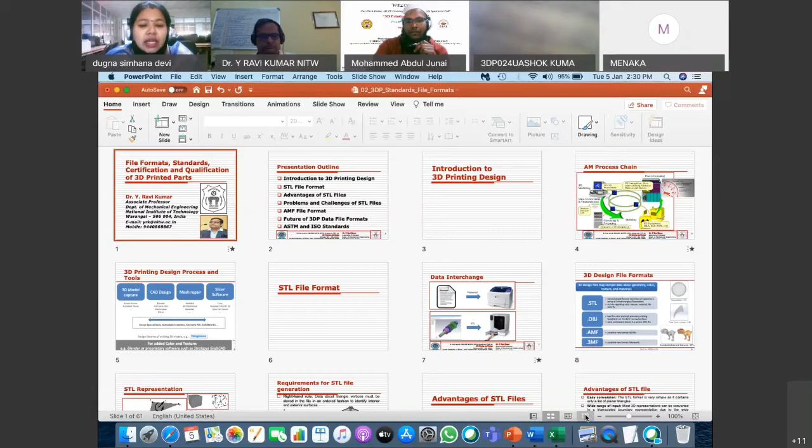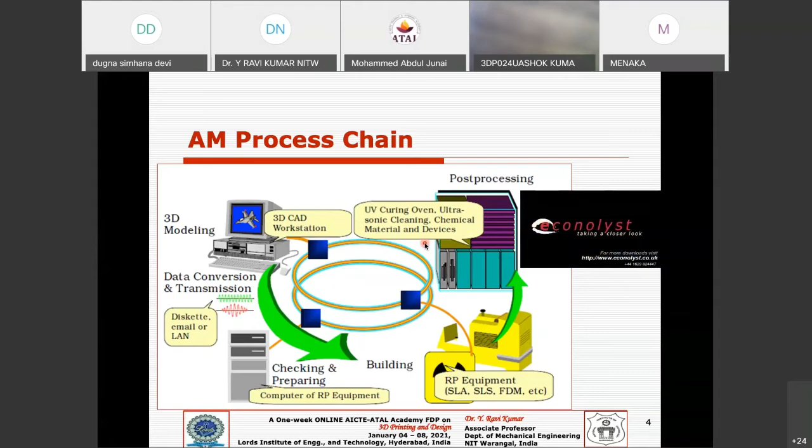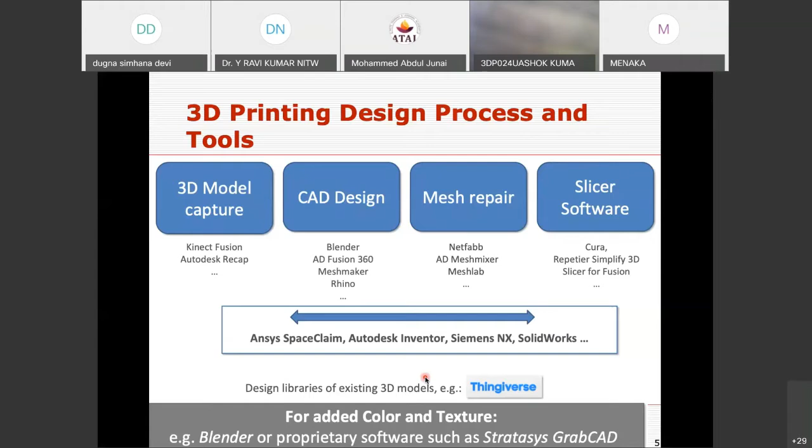So with this, this is a typical design process and the tools available, or the steps involved, while generating your codes in your 3D printing process. So then when we are talking about an STL file, what is an STL file all about?

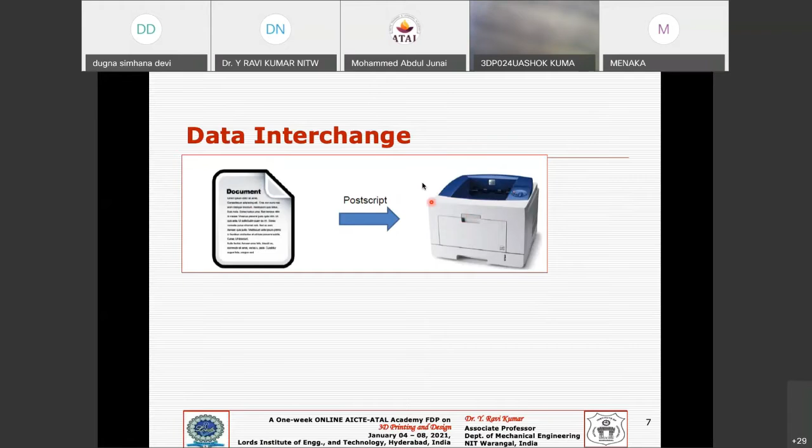So an STL file, basically we need to interchange the data - like your laser printer or inkjet printer, how either a document file, a JPG file, a PDF file, or a PPT gets recognized by your printer and how it gets printed. Your drivers may read this, interpret this into a PostScript form, and that PostScript form will be sent to the printer codes, and it gets printed. So the counterpart of this PostScript, in case of 3D printing, is going to be an STL file.

So you can save your model in this STL file format using any of your CAD modeling software. Once you save this model into an STL file, you can send that STL file to the machine, and based on the code which you have generated, it's getting printed. So basically your STL file is like a PostScript for your office printers or desktop printers. So here is an STL file.

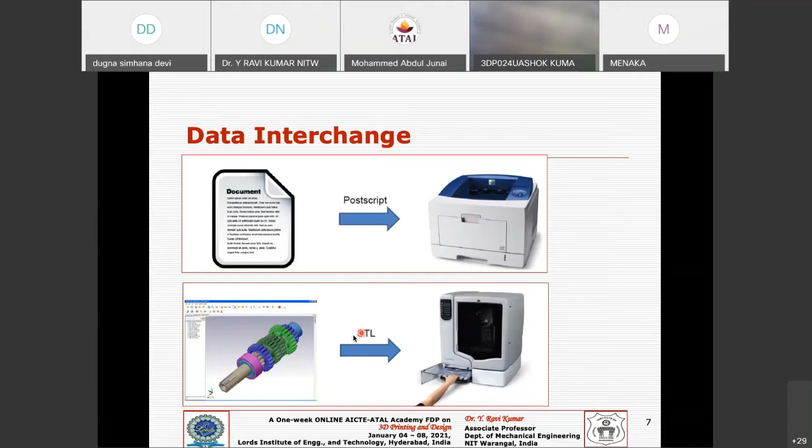So what is an STL file? Any CAD file, or any 3D design file, consists of the geometry - that is the coordinates or dimensions of your model - and the color of the models, the rendered images, colors, and textures. It consists of some textures in that model, and of course it consists of the material information also.

But if you are coming from a CAD domain, you know better - IGS is one form, Initial Graphics Exchange Specifications, called IGS, and STEP is another file format. Similarly, your STL file is the neutral format for 3D printing, unlike IGS and STEP files. Unfortunately, STL supports only geometry, but it doesn't support color, texture, or material. So that is the problem.

And more or less, STL file is a mesh - a triangular mesh. This triangular mesh is basically an approximation of your surface. But you may have other file formats like .obj, the object file. If you talk about object file, you don't need to convert it into triangles, or tessellate them into facets - the free form curve will be represented in case of OBJ.

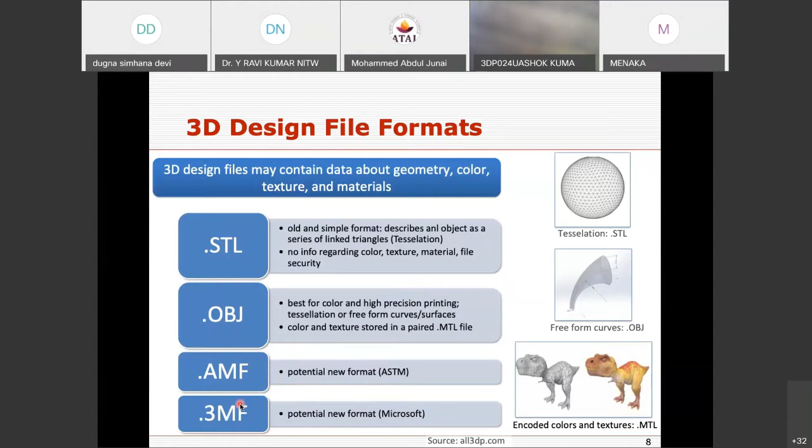An STL file is a triangulated mesh. So if you have a cuboid, at the moment you convert to an STL file, your entire model is represented into a triangle mesh. Typically you have 6 faces in case of a cuboid, and 6 into 2, so on each face you may have 2 triangles, giving you 12 triangles for a typical cuboid. But if you take a sphere, it is more complex.

A sphere is a non-linear or free-form surface, unlike a cuboid which is flat. A sphere is circular and free-form, so you may have more triangles in case of a sphere than a cuboid. If you change to other geometry, you may have a different number of triangles based on that geometry.

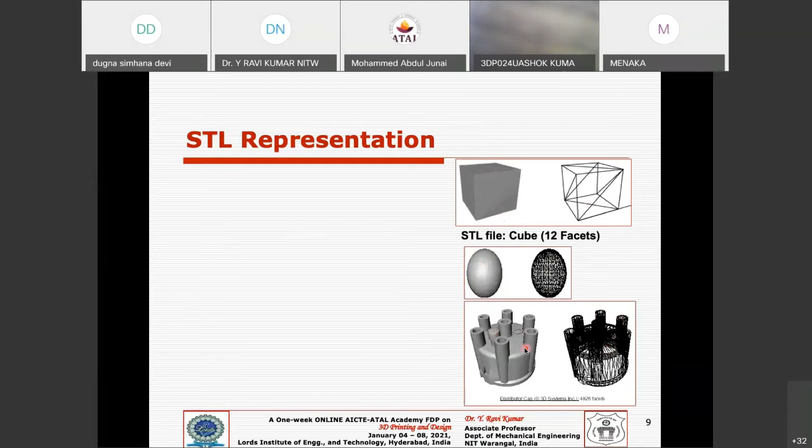But whatever the geometry, your STL file will have a certain number of triangles, and for each and every triangle you have coordinates - x coordinate, y coordinate, z coordinate - because it is 3-dimensional data. I have the vertices v1, v2, v3, and the corresponding x, y, z coordinates will be there in the form of a coordinate.

Apart from the triangle, I have a normal, which is a vector, and those vector coordinates are also there in your STL file. This is a typical ASCII file format. If you go to binary format, as we know binary is machine understandable language. So you either save this STL file as binary or ASCII. If you save in ASCII, you can read out the coordinates of the triangles.

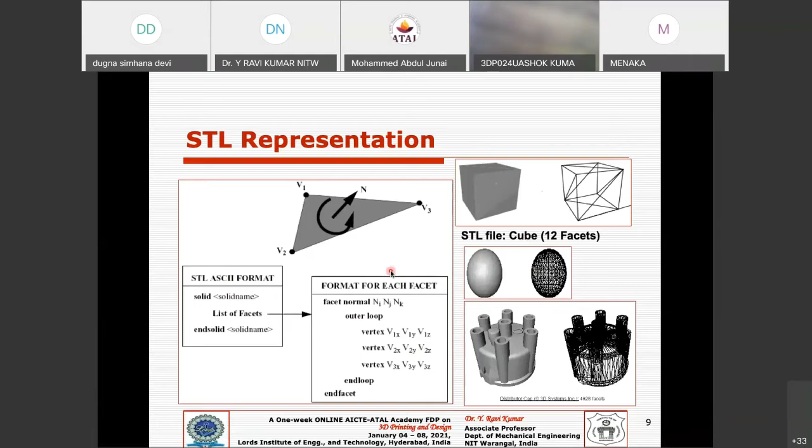It doesn't matter what form you save it in, everything is represented in terms of triangles and their coordinates. And the STL file must satisfy 2 rules. One is the right-hand rule, another is the vertex-to-vertex rule.

What is the right-hand rule? If your triangle belongs to an interior surface, then you have 2 chances - a particular triangle may belong to an interior surface or an exterior surface. If a triangle belongs to an interior surface, the notation will be clockwise - that's the 1, 2, 3 convention in your data structure. If the triangle belongs to an exterior surface, it may be an anti-clockwise notation, so 1, 2, 3 will be saved that way.

So that's the right-hand rule. Then you have the vertex-to-vertex rule, which says that you have 2 adjacent triangles, and these 2 adjacent triangles must have a common side. Then it satisfies the vertex-to-vertex rule. Any typical STL file must satisfy these two rules.

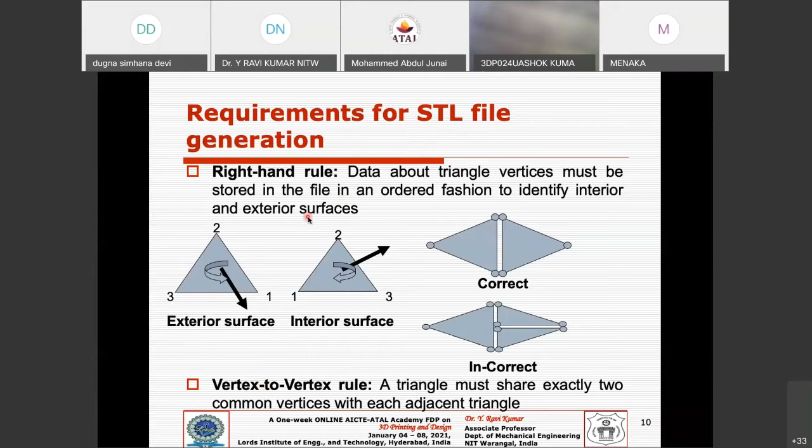What are the advantages of STL files? One advantage is easy conversion - the file consists of planar triangles, and a planar triangle is the simplest of all polyhedra. The polyhedra family starts with the triangle, which is the simplest of all polyhedra.

Why triangle? Why can't it be another form? The reason is it's the simplest of all polyhedra, so it's very simple since it contains only a list of planar triangles. That's one advantage.

It also has a wide range of inputs, meaning all CAD/CAM/CAE packages have this STL file tessellation algorithm built in. These triangulation algorithms are inbuilt and are more popular and widely used in all CAD/CAM/CAE packages.

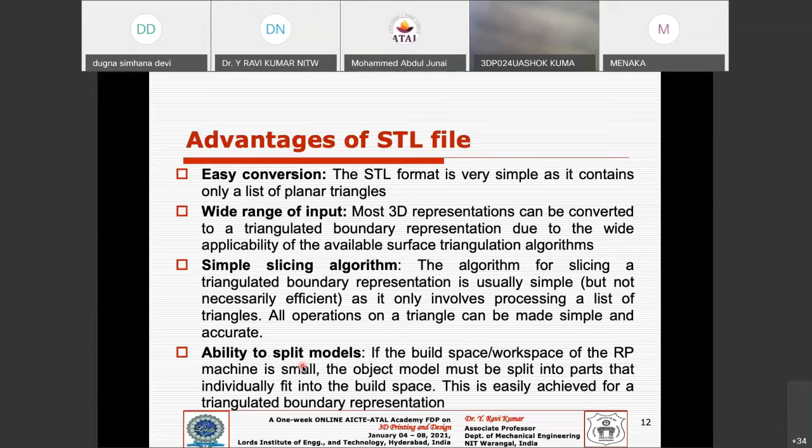Now what about the problems? Once you're talking about the advantages, what could be the problems of this STL file? The problems are in several folds. It will be, say, by the boundary representation, because of the approximation of your curve into a triangular facet or triangular edge. So it is an approximation.

And then you may have some intrinsic problems, like in terms of file size, truncation error, incompleteness, inconsistency, inconsistent normals, or incorrect normals. We'll discuss them one by one.

And you may have issues because of your CAD software, which has an algorithm that converts it into an STL file, transforming it into this tessellated format. That may create some kind of gaps, internal walls, degeneracy, or deviation, either in terms of geometry or topology. Sometimes incorrect intersections will also lead to STL file problems.

We'll discuss these problems one by one.

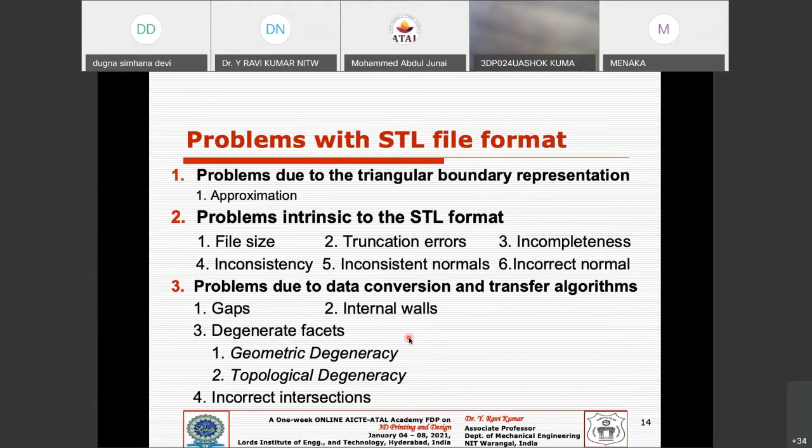And of course, as we already know, if you have some surface generated through a B-spline, a NURBS surface, or a Bezier surface, the moment you save it as an STL file, your surface is now approximated with triangle edges, approximated in terms of triangular edges, triangular facets.

So you are losing data, or you have some error, from the original geometry to the STL file representation, but you can't do anything about it. Why? Because this is approximation by the rule, by the syntax and semantics of this STL format, and you are losing some data. You are not transferring your data fully to the STL file or to your 3D printer from the CAD to the 3D printing format. You are losing some data. Basically you are approximating, you are not taking 100% of the data.

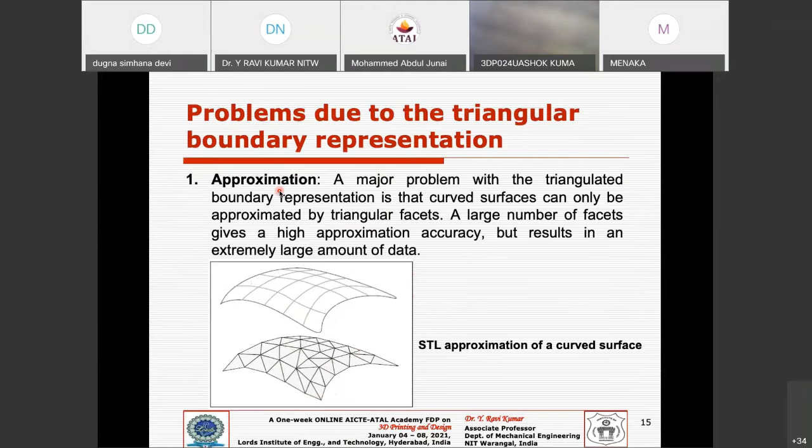And then you may have the intrinsic problem that the file size is too large. Why? Because you have redundancy because of edge duplication, which may unnecessarily lead to a bigger file size.

Your designer might have used dimensions as double precision real numbers, for example. But the moment you save that data into an STL file, your double precision real number gets truncated into a single precision real number, where again you get a truncation error. So from the original designer's geometry or dimensions to the STL dimensions, you're truncating some values, resulting in a truncation error.

And it is an incomplete representation. Why? Because the STL file doesn't support topological information, it consists of only geometrical information - that is, in terms of coordinates. It doesn't support associativity or connectivity, which we normally call topology. Because it doesn't support topology, it is definitely an incomplete representation. It never becomes a complete representation.

And inconsistency may be due to tolerances. Whenever you join two STL files at an appending portion, it may have some inconsistent tolerances that you can come across. This may be another problem intrinsic to your STL file format.

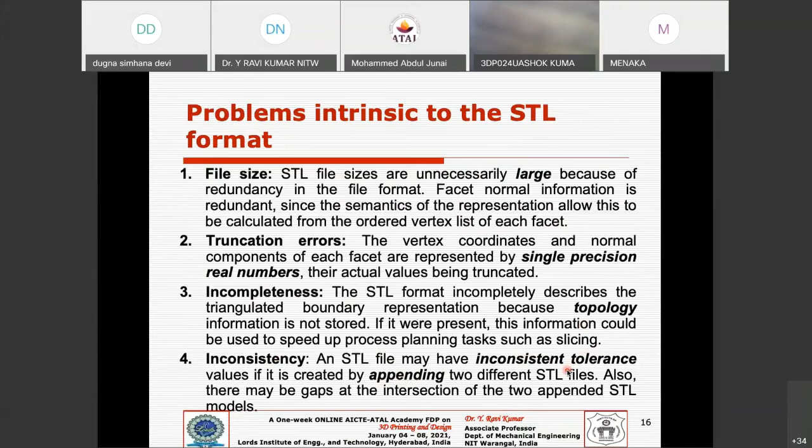And some inconsistent normals - your normal should every time be projecting perpendicular and outward to the outer surface. But sometimes it may be projecting inside, so we need to flip those normals. That may be another problem: inconsistent normals.

Some incorrect normals can also be an issue. Normally you have the triangle facet information or the triangle side coordinates. From the side coordinates, you can even reverse calculate your normals through vector calculus. But it may mismatch the value you calculated with what your tessellation or conversion algorithm has given as the STL output. There is a deviation between the calculated values and your software given values, so there is an incorrect normal issue as well.

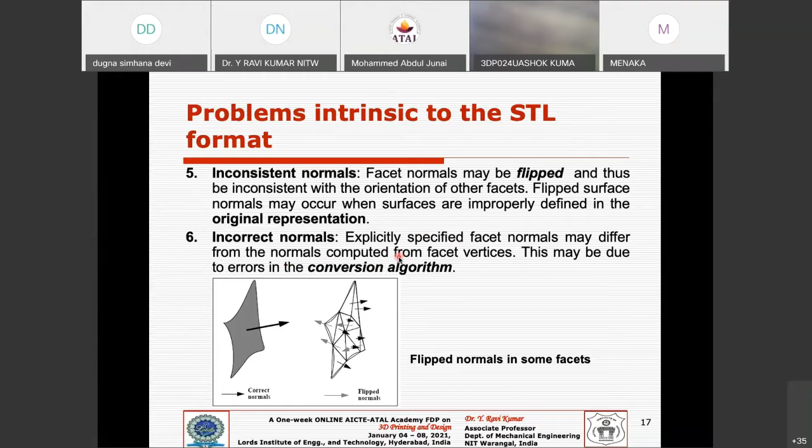Then you may have some data conversion algorithm issue, like a triangle getting missed. So you have one surface, another surface, and at the junction of these two surfaces, if one triangle got missed, the next step will be slicing. Say I have a slicing plane with 0.1 mm, meaning 100 microns, if I try to slice this model, and if a triangle got missed, it may not result in a closed boundary or closed contour. If the triangle had not been missed, you might have gotten the closed contour, but because of that one gap, it never becomes a closed contour.

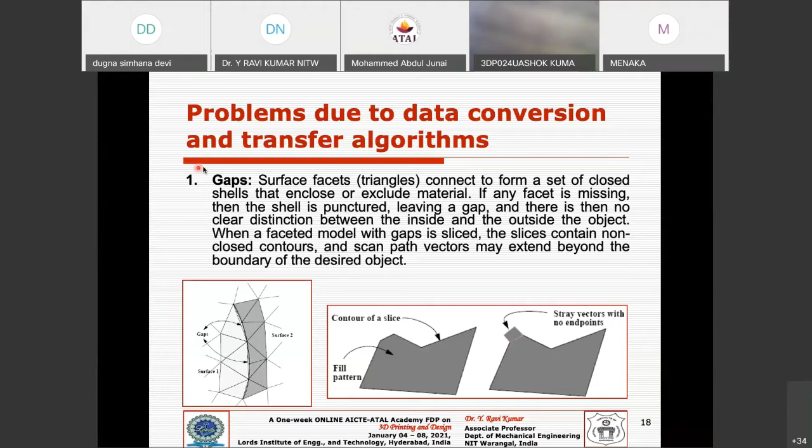If it never becomes a closed contour, your laser or extrusion nozzle cannot have a clear cut path to deposit or scan if it's a laser-driven technology. So you may end up with a kind of stray vector which has no endpoint. That's the basic problem once you have these kinds of gaps or missing triangles.

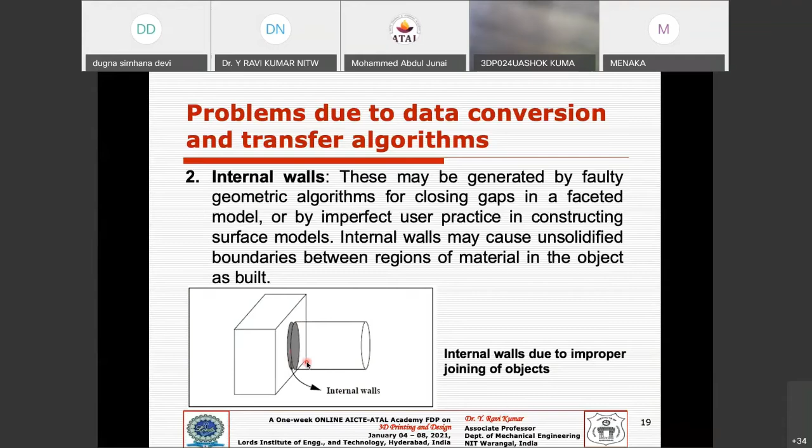You may also have some internal walls while designing. Say you have one surface and another surface, and if the designer misaligned or improperly did this design, then you may end up with internal wall problems.

There's also some kind of deviation or degeneracy. This may be due to even though you have three vertices, all three vertices are at the same location or same coordinates, but that may not produce any surface or area. Once you don't have an area, it becomes a kind of deviation or error in terms of topology degeneracy.

But it may also be the other way around: though you have three vertices, they are not contributing to a triangle or area, because all three are collinear. So it doesn't represent any area of the triangle - this is called geometric degeneracy. So either a topology degeneracy or a geometric degeneracy may occur due to your data conversion, transforming algorithm, or tessellation algorithm while converting your STL file. This is another problem you can normally come across.

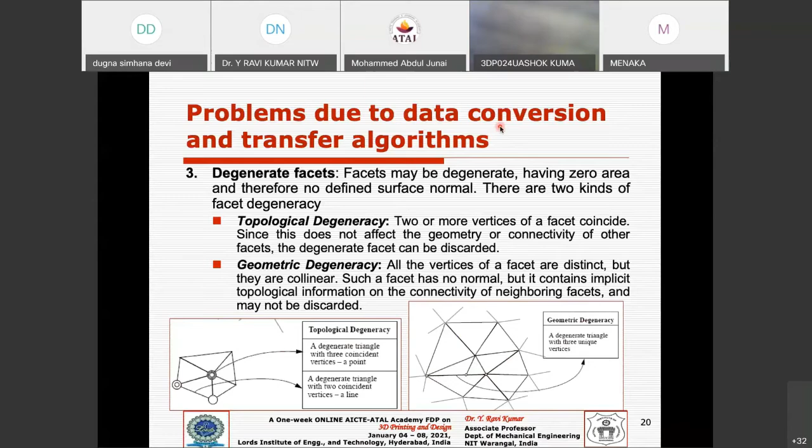The last one is incorrect intersection. None of the two triangles should ever intersect - if it is intersecting, that is treated as an error. We need to place it in the correct position; if it's misplaced, and it's an extra triangle, we need to discard it. So there should be no intersection among the triangles - if there is, it may lead to an error.

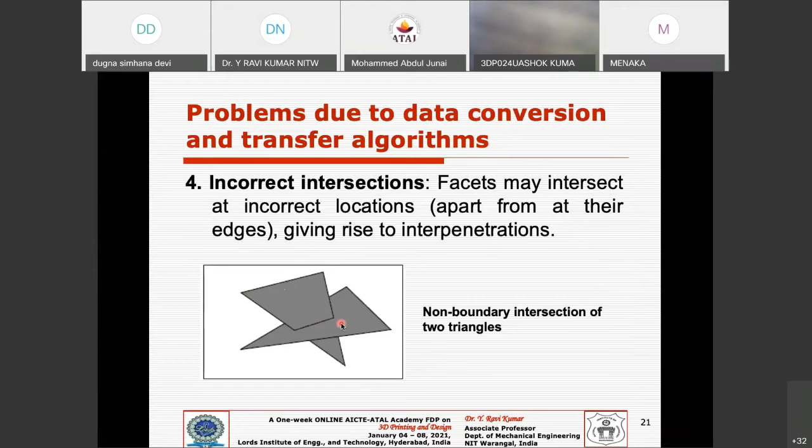If you found errors like this, we need to rectify and correct them. Otherwise, if you are erroneously slicing, the next step will be slicing, and your contours may not get a proper cross section. Altogether you may end up with a build failure or build error that you'd have anticipated at the end of the day. As we know, in computers, if you give garbage in, you get only garbage out. So you have to be careful while handling this data - it should be free from all these errors. Once you are free from all these errors, only then can you say it is a valid model.

So with a valid model, you start with a 3D model, then slice it and generate the two-dimensional slices, and finally you have a 1D slice, the scanning lines. This is the scenario for a valid or watertight model, a model which is free from all the errors.

If at all you have some error in your STL file, in terms of some gap or missing triangle, then while slicing, your slicing algorithm may get confused. It never forms a closed contour or closed boundary. If it is not forming a closed boundary because the triangle got missed, the connectivity got missed, then it never forms.

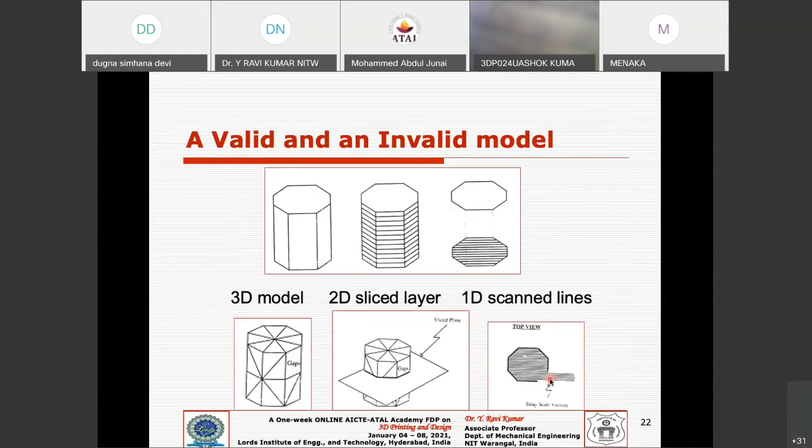Otherwise, if there is a triangle and it would have been a closed boundary, the needle or laser would have been deposited or filled in a more meaningful way. Because you have this error, being an invalid model, your deposition may be abrupt, or it may have an infinite loop or a trace. It may create some stray vector, and then finally may lead to a build failure or bad part production. So we need to be careful while operating with this kind of issue.

What are the challenges with your STL file? The STL file challenges are duplicate information, leaks, inconsistency, and it does not scale well when you have high resolution data and lattice structures. It does not support color, does not support material, and doesn't support orientation. So then how do you address these challenges?

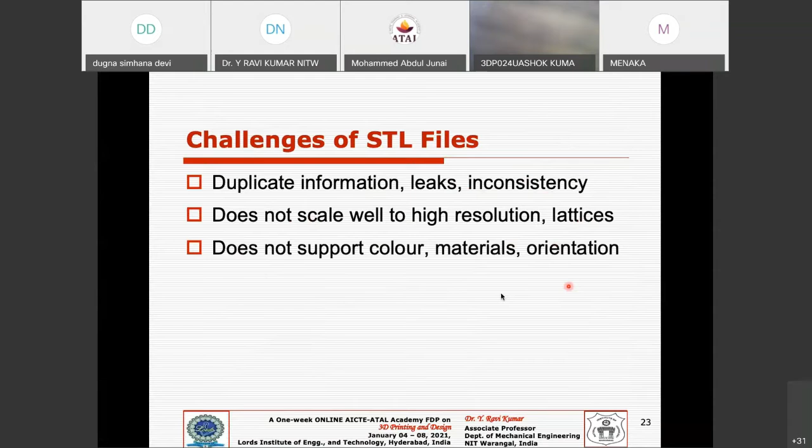That's what the ASTM is proposing: an AMF file format, which will address all these problems and errors that we are talking about. So then how do you get it addressed by this AMF file format?

Basically, AMF file format, that is Additive Manufacturing File Format, is an XML script, and it is going to be the meta format, or format of formats. It's a text-based script, an XML script. It is easy to read, easy to write, easy to parse, easy to edit, and easy to extend, and it can be highly compressed. The data will be highly compressed.

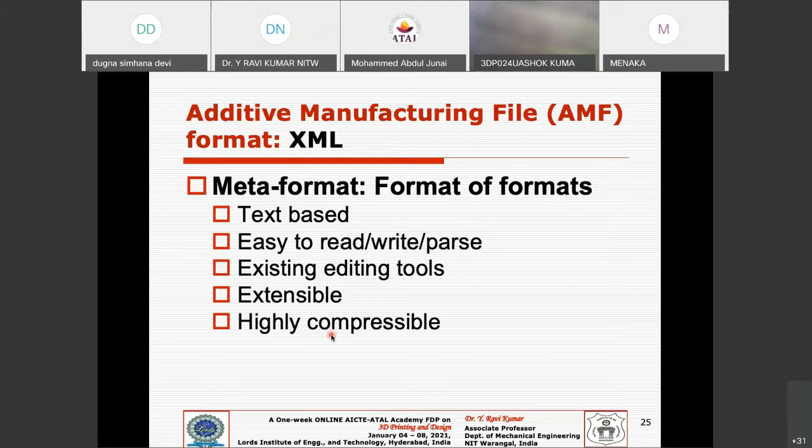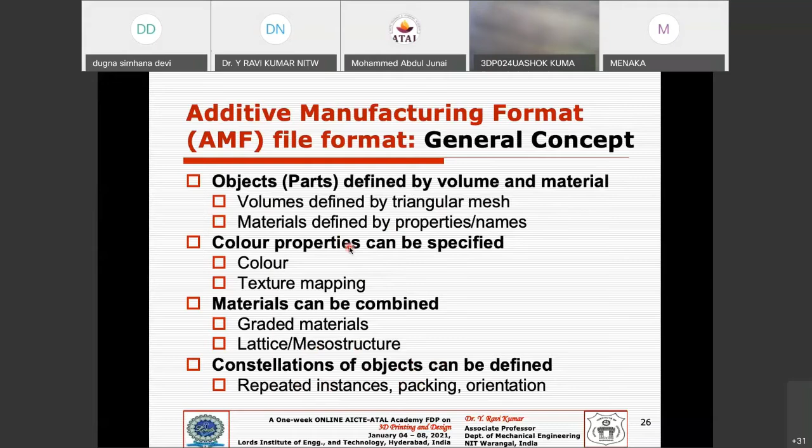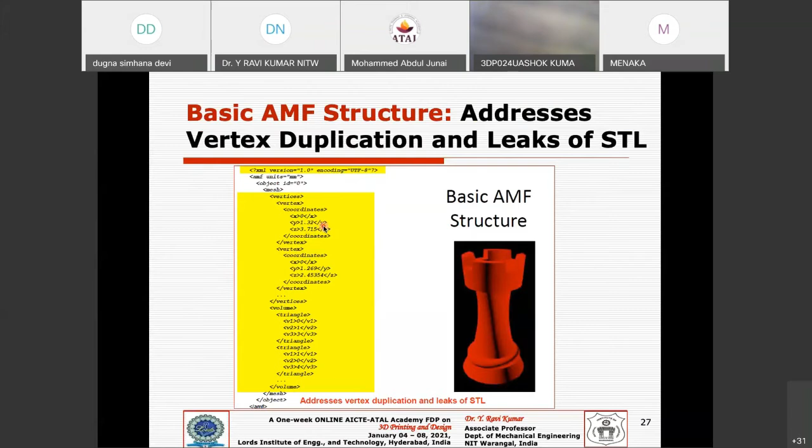Then how do you address the duplication of the vertex and the leakages of the triangles? AMF will address such kind of duplication and leakages because of its XML script nature, and it can be easily compressible.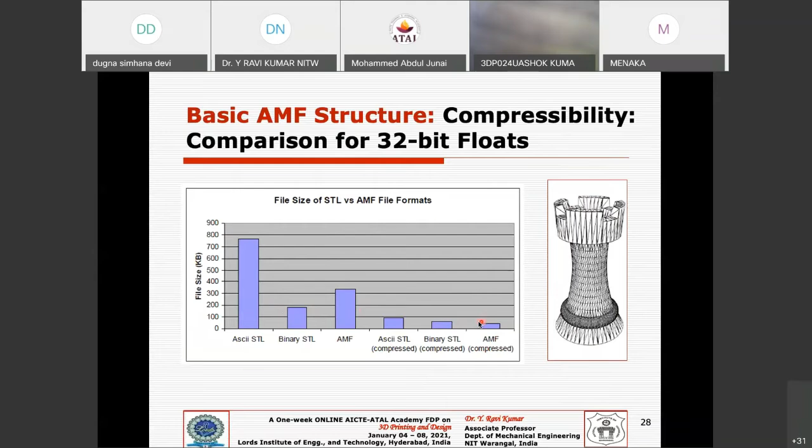But once you compress this data, once you have zipped these files, surprisingly AMF should be in between binary and ASCII. But surprisingly it is even less than the size of compressed binary. So that's the advantage - AMF is more compressible in nature than the STL file. That's another advantage of how it is addressed by the AMF file format.

Geometric inaccuracy may not be there in AMF file format versus STL file format. Why? Because STL, as we understood, uses planar triangular patches, but the planar patches are replaced with curved triangles. So whenever you have curvature, previously STL file curvature is represented with a triangular edge, but here the same curvature will be retained because you are approximating with a curved triangle rather than a planar or flat triangle.

So in that way you can address your geometric error through these curved triangles. Even if you have curved edges, there is an edge tangent also introduced here whenever you have curved edges, and whenever you have curved surfaces, your AMF file will automatically assign curved triangles.

And if you have a flat surface, your AMF file will assign planar triangles. So it is adaptively going to assign different kinds of triangles and tangents whenever necessary. In that way, AMF is going to address the geometric inaccuracy that you come across in STL files, but it is not there here.

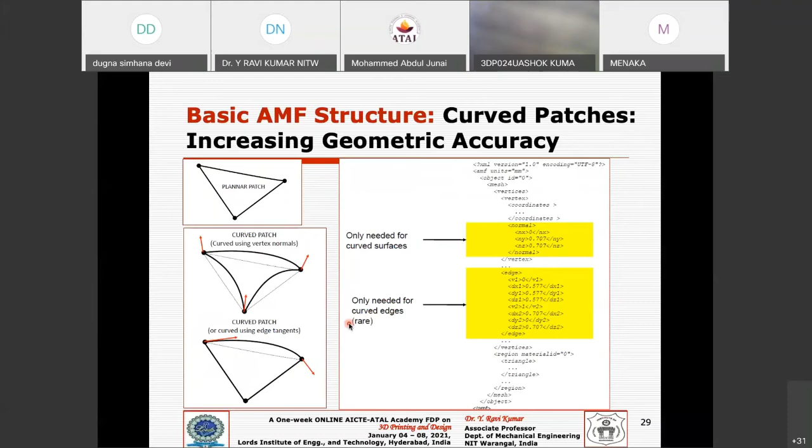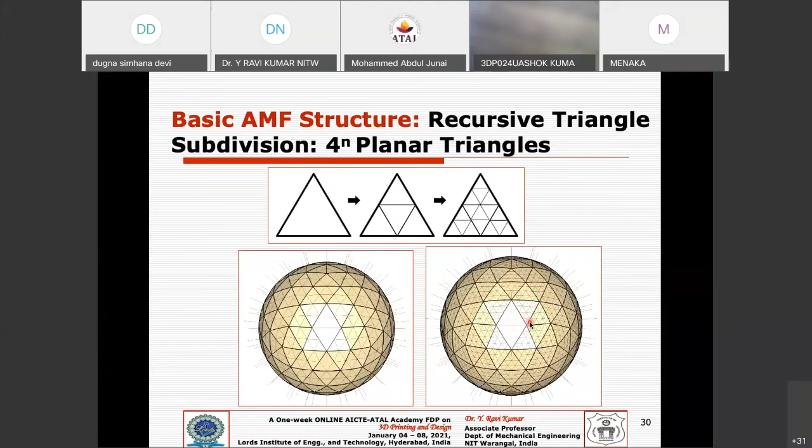And it can even be recursively subdivided, like you can have one triangle, and further it can be 4 power 1, or 4 power 2, and with 4 power n, we can recursively subdivide in order to improve the resolution of your file. You can even do this.

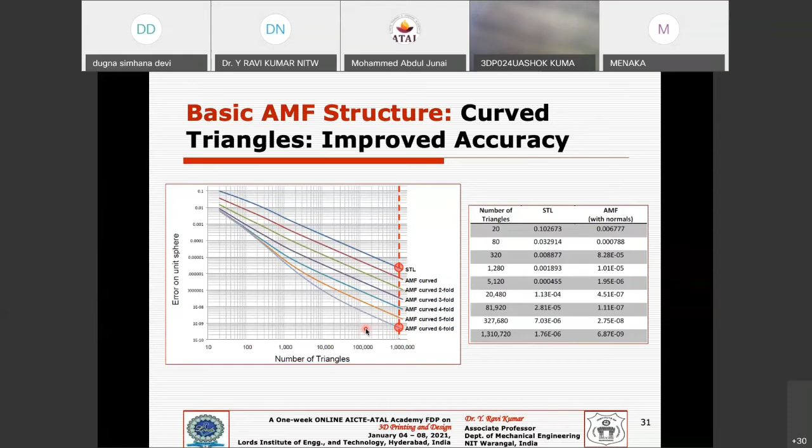And if you see the accuracy improvement or the error, a typical STL file with the same number of triangles, if you compare, say an STL file with the AMF with single fold, that is 4 power 1, and 4 power 6. If you come to the 4 power 6 level where the error is almost negligible, then you can conclude that it's going to be more error free, or the accuracy is high in case of AMF file format.

And even your materials can be assigned differently at different regions. Why? Because your 3D printers can print in multiple materials. So why not your AMF file represent one region with one material and another region with another material? That will be addressed by this AMF file format, through the multiple material representation.

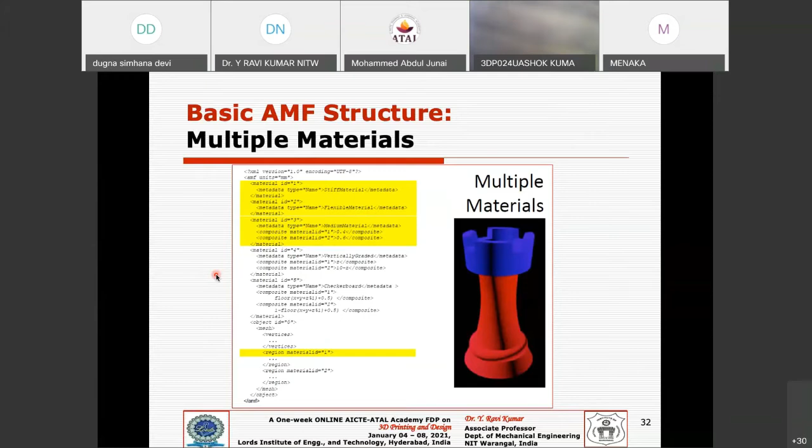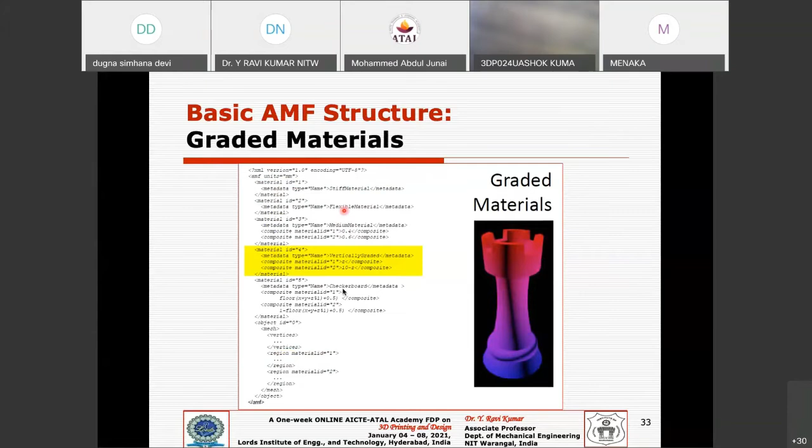And not only multiple materials, you have functionally graded materials, or grading of the material across the length, so you have different compositions. You can specify that grading of the material in your AMF file format. And it will also support microstructural aspects.

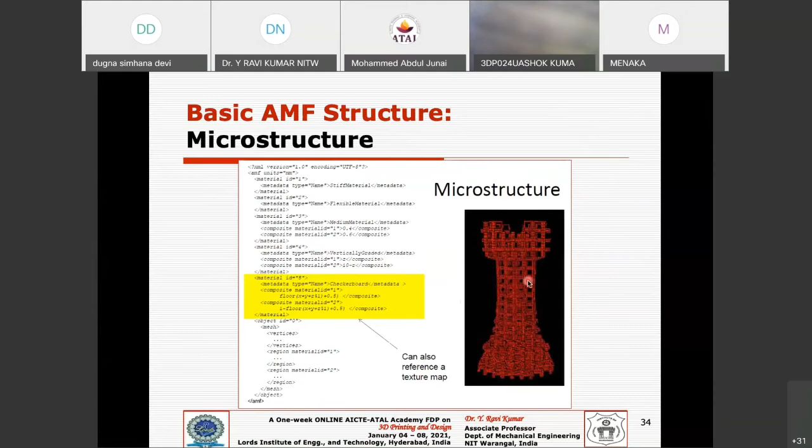So then what is the current status of this AMF file format? The ASTM F2915 is the standard for AMF, and the first revision, 1.1, came out in 2012. This is under adoption, but the adoption is not yet great by all these software vendors. Still, they may be going to a different version, the current version they are developing. We'll discuss more elaborately in the upcoming slides about these standards.

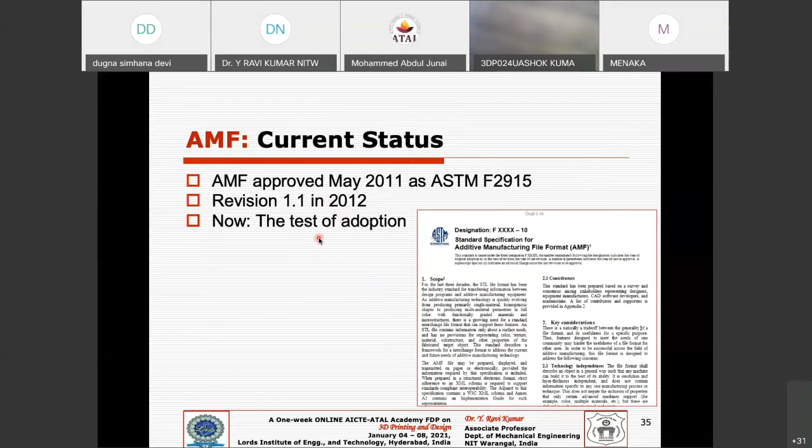So they may have future plans for AMF, getting incorporated while developing the next version of this AMF file format. They have plans to incorporate tolerance information, like you have in STEP files versus IGES. The STEP file consists of tolerance information, whereas your IGES file doesn't support that. But your AMF file, they are planning to include manufacturing tolerances also in the AMF file format.

And they are planning to have surface or depth kind of textures incorporated, and data encryption, copyrights, external references, subassemblies, and process control is also another aspect which can be included in your AMF file format. And non-volumetric support structures are also going to be supported. And it can even be non-mesh geometry, like voxel or feature-based representation. They are trying to incorporate these features in the new upcoming version of the AMF file format.

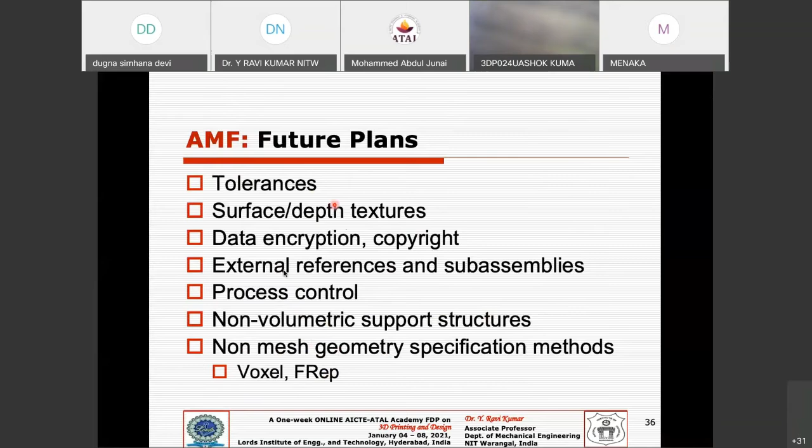So with these future plans, we have thoroughly discussed the STL file format and AMF file format, the various problems, limitations, and challenges of STL file format, and how these are getting addressed in AMF. That we have covered.

And then what about the code, the contour data, or something like G-code, M-code in case of a CNC system? Whereas here you don't have a common file format, different vendors may be using their own proprietary formats for this contour data, or cross-sectional data, or layered data. Like you have SLC, SLI, CLI, RPI, LEAF, and so on. But unfortunately, there won't be any common format for this kind of contour data.

In contrast with additive manufacturing, in conventional CAD systems, as I already said, you may have IGS, STEP, and in the medical domain, you have CT, and in printing you have HPGL. So these are the file translators you typically come across, other than AM. In CAD or the medical field, you normally come across these.

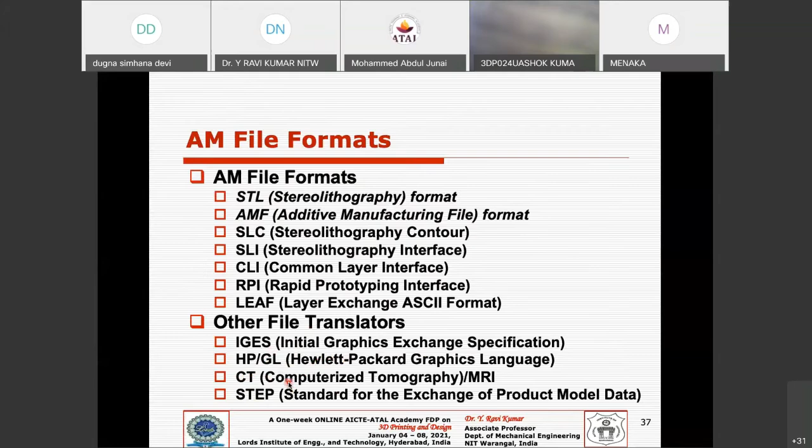So with this, I have completed my first part of my presentation, and let us talk about the next part, that is standards, ASTM or ISO standards.

So first of all, what is a standard all about? The standard is something to be measured, or to have some norm or model for comparison in your evaluation - meaning you have produced some part. So in the last session, participants were asking questions like, how do you get the repeatability? How do you ensure whether you have made a good part or a bad part? Until you have a standard, until you have a benchmark, or until you have some reference, it's not a scientific way of taking a decision on whether it is as per the standard or the norm.

So that is exactly what a standard is. If you see the ASME definition of standard, it can be defined as a set of technical definitions and guidelines - kind of instructions for the designers, manufacturers, and even the users. You can buy a product, then how can you ensure that it is as per the standard, as per your expectation, and that expectation is as per the standard available? Especially if you are exporting your products to some other country, it should be - then only people will buy and trust you, right? Otherwise, until you say some ISO standards or ISO certified companies, then only people have some confidence in you, so then people will buy your product. So that's about the ASME definition.

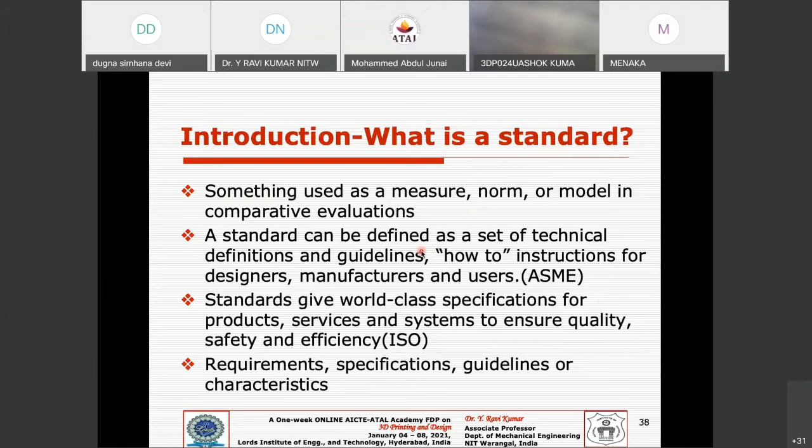So the standards are very much needed for 3D printing. Why? Because it's a relatively new technology. Until you have a standard, you cannot justify whether you made a correct part or a bad part, or how do you ensure that it's getting correct or not, right? Until you have a standard - so then why do we need a standard?

The standards give business and consumers confidence that the goods or services they are developing or using are safe or reliable, and will do the job they are intended for. So basically it will give you confidence, or a kind of business opportunity if you're a manufacturer. So then how will the customer trust you? Once you have these kinds of standards and certification saying it's ISO certified, then people will have confidence that they can buy this ISO certified product or ISO certified brand.

And the standards help make laws and regulations consistent - you can go to court, you can file a case legally, you can proceed saying this is not as per the standard. Until you have a standard, you cannot claim legally. So then it will help you go within a legal aspect.

Also, the standards help ensure the products comply as per the standards, which gives some kind of competitive edge for your products, especially if you are in an international market. Why? Because people will look for what kind of certification he or she is having, who got qualified, or who has given the certification for your products. If you are an international player, this is very much needed.

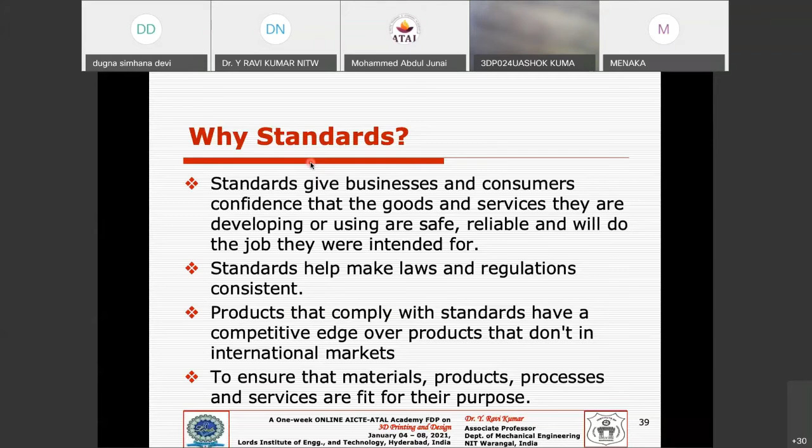And to ensure that either the materials, the products, the processes, or even the services are fit for their purpose - that's what we need standards for. So that is very much needed, nevertheless, for the 3D printing or additive manufacturing industry.

So whenever you want to industrialize - if you are using it for domestic purposes, then it doesn't require standards or certification, that is purely for internal consumption or domestic use. But once you are elevating this technology to industrialization, so AM or 3D printing is getting further industrialized or further matured. So definitely, your AM industrialization may happen only then.

So the standards are very much needed, or the key for AM industrialization. The standards will ensure your process control, and it will ensure product quality assurance, and it will define the levels of criticality, right? And it will reduce the risks of failure. Someone was asking, I am not getting my SLM parts to be more reliable, or I am not getting consistent builds.

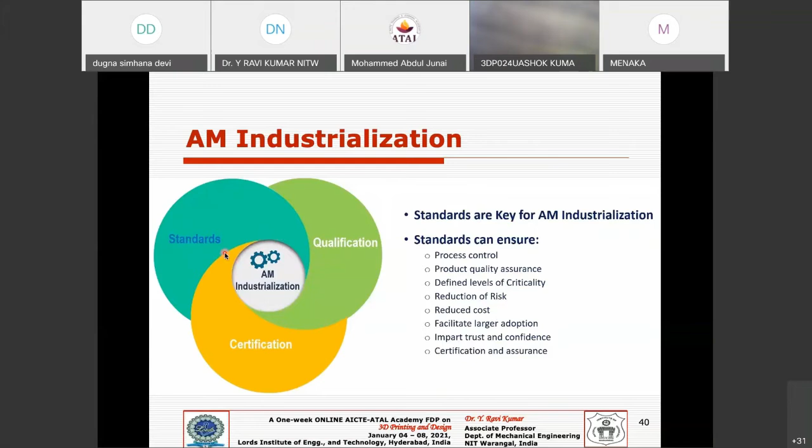I'm going to give you very short time on this. I'm going to give you the statistics of it.

STL files have a lot of errors. So your data formats and retentions, and your raw material should be consistent as per your standards - the powder particle size, or the flowability, or the viscosity, or things like that, right? It can be as per the raw material.

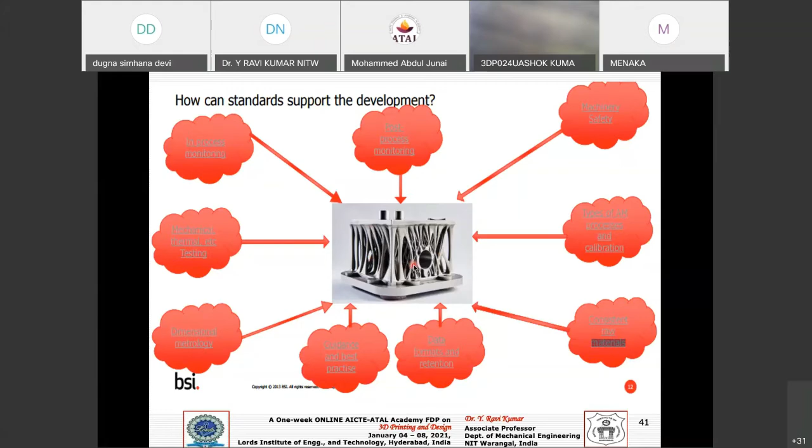Or your feedstocks, and as per the types of AM process, calibrations should be done, and machinery safety. Once you have the standards, post-processing monitoring and in-process monitoring can all be achieved - the best quality of your additively manufactured parts once you have these kinds of standards.

So coming to AM and ASTM - as we know, ASTM stands for American Society for Testing and Materials. ASTM has several series starting from the A series, for steel, concrete, and the like. But coming to additive manufacturing, you have F42 allocated for additive manufacturing standards. So ASTM F42 stands for additive manufacturing standards.

And as I have been talking about, they have classified AM systems into 7 categories, as per the agreement of ISO and ASTM. These are actually two independent bodies - ASTM is an American society, while ISO is an international standard. But ASTM was formed well before ISO was formed.

So ASTM has a long history - it has been around for a long time. And whenever there's an agreement between the international standard and American standards, you get ISO/ASTM - a combined standard developed from both international and American standards. That is, say, 52900, where 15 stands for 2015. It got approved, or published, in 2015.

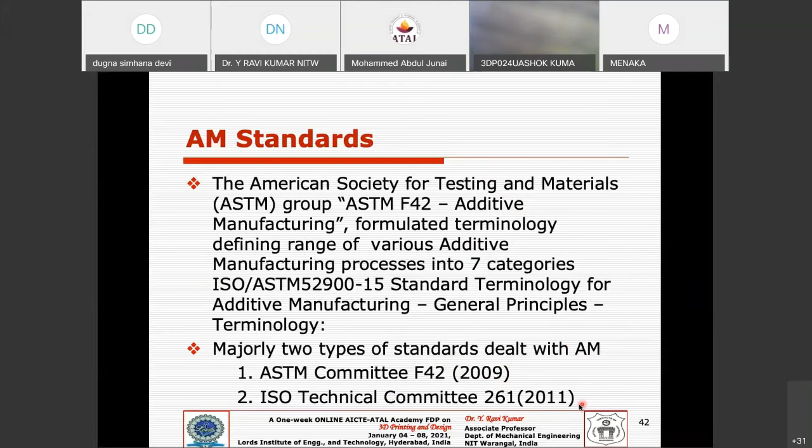You may have general top-level AM standards, category-wise AM standards, and specialized AM standards - meaning application specific, process specific, or material specific. So you can categorize into 3 subgroups.

In general AM standards, you can even start with the terminology. Just now we are talking about - they have given some standards for terminology, that is ASTM F2792, 12A, and from ISO standards, that is ISO 17296-1, and the combined ISO and ASTM, you have 52921-13. That is the general terminology aspects.

Whereas process specific and material specific, you have ISO standard 17296-2, and qualification and certification methods. Somebody was asking in the previous session how do you ensure that qualification and certification could be done - so you have separate things for qualification and certification methods, and requirements for the purchase of AM parts.

If you want to get some service from a service bureau, and you have some standards, then you can issue some legal notice to the service bureau saying that it is not as per the standards, right? So you may have some requirements for the purchase of AM parts - that is also there.

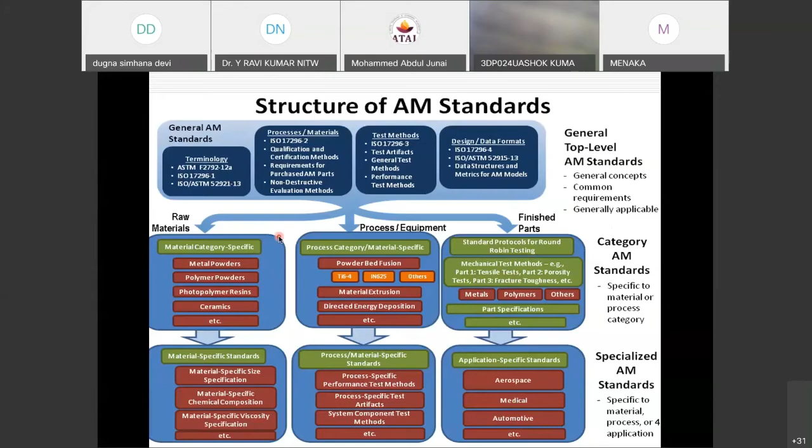This is the typical structure of AM standards - these are the typical categories. As on date, ASTM F42 has several subcommittees. For test methods, you have 3 published ASTM standards, and 4 under development.

For design, you have 2 existing and 5 under development. For materials and processes, 9 existing and 20 under development. For environmental health and safety, none of the standards are available, but they have reserved this category - maybe in future it can be developed. For executive, none available. For strategic planning, nil. For terminology, 1 existing. And tagged to ISO, nil.

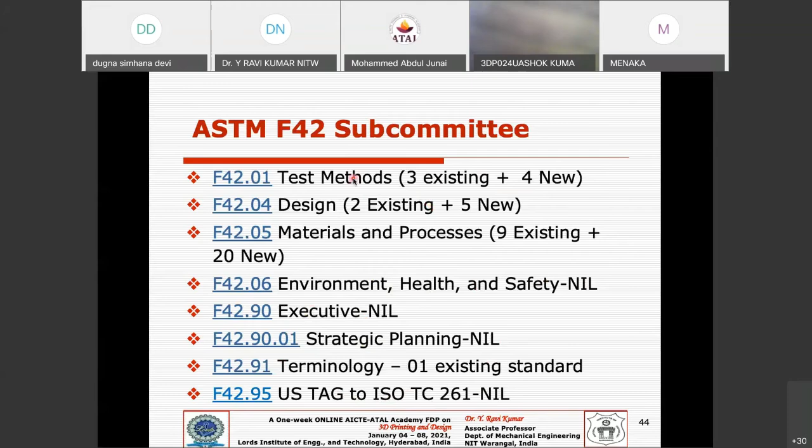So typically you may have very few ASTM standards, maybe if you subdivide into test methods and the other categories. So then coming to the test methods - these are the test methods.

The standard F2971-13 is for reporting data for test specimens prepared by additive manufacturing - exclusively for testing and preparing test samples or specimens. For this we need to refer to it. And for mechanical properties of metal materials evaluation, you may refer to F3122-14 ASTM standard.

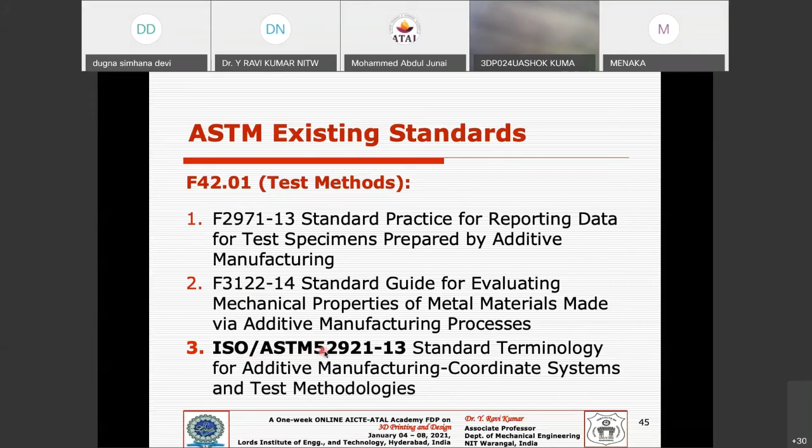Then coming to the ISO and ASTM combined effort, that is 52921-13 - standard terminology for additive manufacturing, coordinate system, and testing methods. This is a combined ISO and ASTM standard, wherever there is understanding between international and ASTM, they have published it jointly.

And for design, the AMF file format we just discussed comes under ISO ASTM 52915-16 - that is the AMF file format, the 1.2 version we just discussed.

Then you have design for additive manufacturing, DFAM. For DFAM standard guidelines, you can refer to ISO ASTM 52910-17. And for terminology, we need to refer to F42.91, and the corresponding ISO ASTM number.

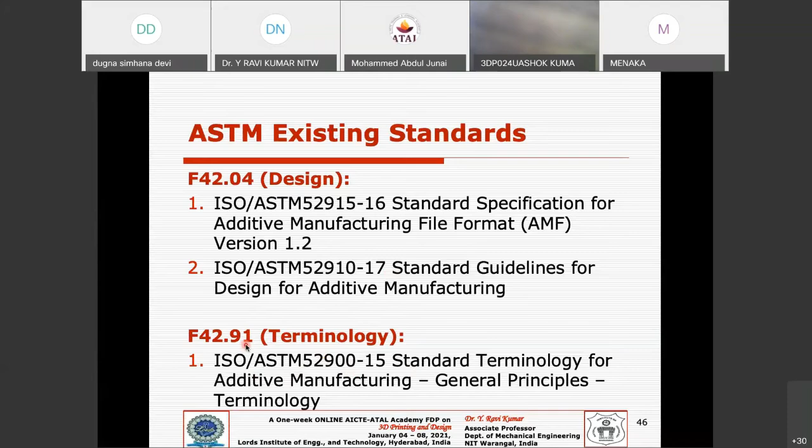Similarly for materials and processes, especially for powder bed systems processing titanium 6-4 aluminum vanadium, this standard should be referred to.

And if you have ELI composition - that is extra low interstitial - for powder bed, same titanium 6-4 ELI grade, this standard should be followed. And for characterization of metal powders for additive manufacturing, you should refer to F3049-14.

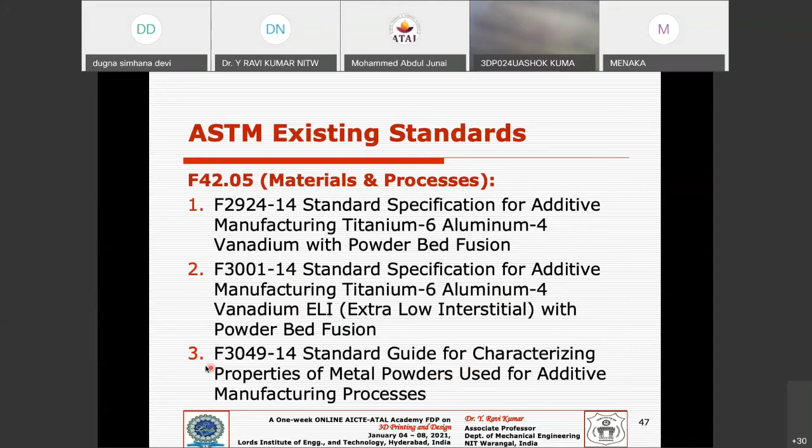For materials and processes, the standard specification for AM nickel-based alloy, Inconel 718, we need to refer this - that's for powder bed systems. The DED system requires different standards.

For powder bed systems looking for Inconel 718, we refer to F3055-14A. And for a slightly different nickel grade, Inconel 625, you refer to these standards - this covers the nickel-based alloys.

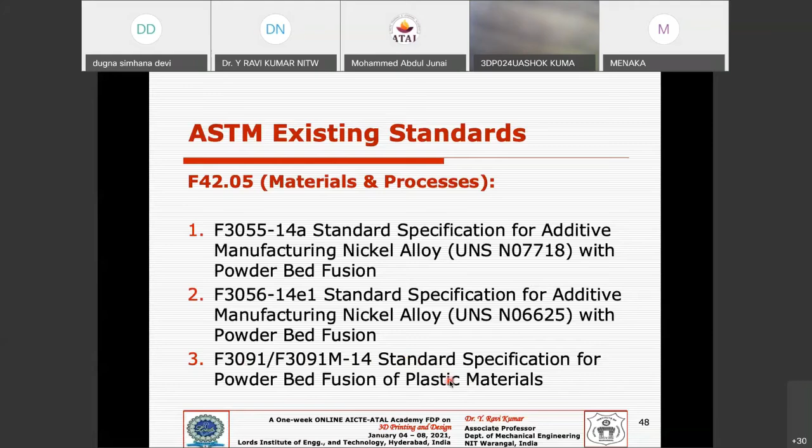If you're looking for polymer material for powder bed systems, we need to refer to either F3091 or F3091M-14 - that's for plastic powder bed systems. And even for stainless steel with powder bed, we need to refer F3184-16.

For the DED system, directed energy deposition of metals, we need to refer F3187-16. And ISO ASTM 52901-16 is the standard guide for additive manufacturing general principles and purchase of AM parts. This is quite important if you are getting service from a service bureau for your parts - you should ask whether it follows these standards or not.

You can very well check it. Otherwise, you can proceed legally through the service bureau.

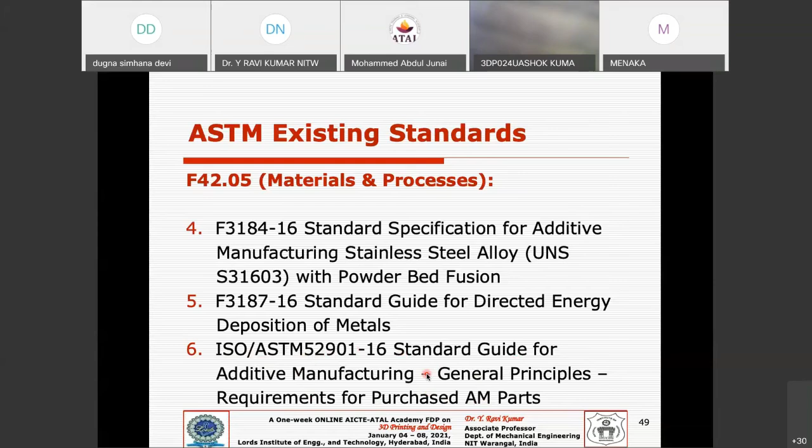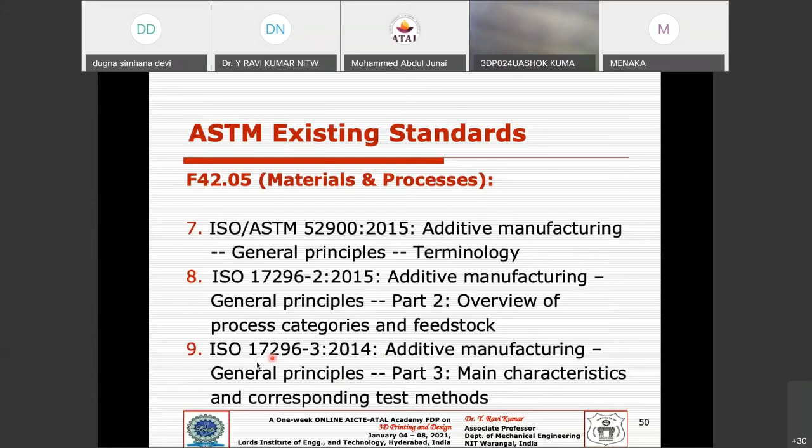And then you may have terminology related, and general principle related numbers, and then main characteristics and corresponding test methods. You may have different materials and testing for ASTM existing standards.

And similarly, from the ISO side, indigenously, they have developed standards. Whenever they don't agree with the ASTM, then they come out with the ISO. Whenever you find ISO, that is indigenously developed by ISO. But this is again a combined ISO ASTM standard for general principles and the same thing. But whenever they don't have an agreement, then you can find some ISO kind of standards.

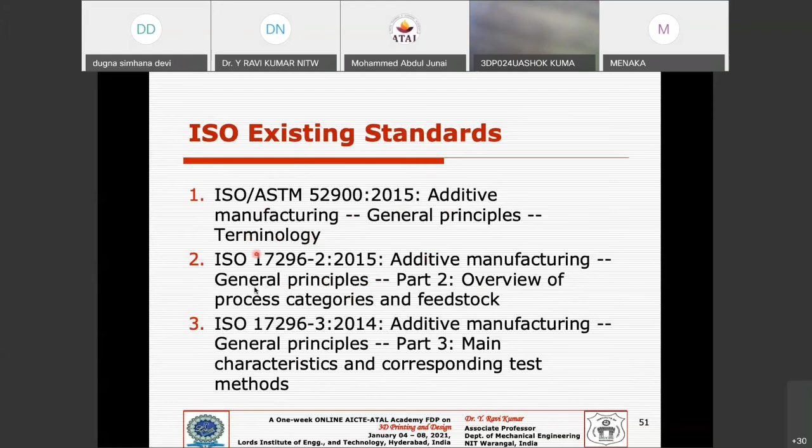You can refer to whichever you want to follow, whether ISO or ASTM. So then that is up to you, like you have these published.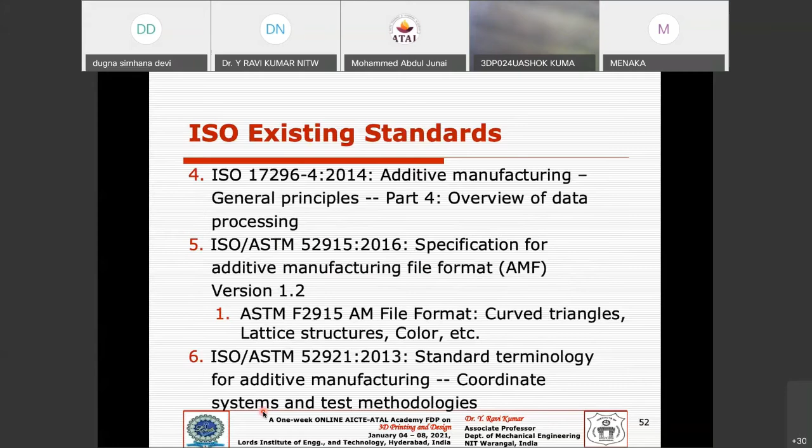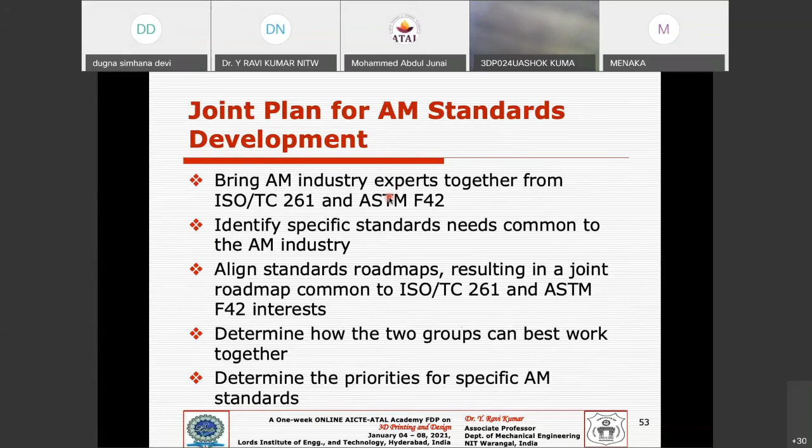Standards which you can even refer to. So then they have a joint plan for additive manufacturing standards developed for this. You can go through it, but finally then you may have the ASTM and the AM.

They have come out with Centers of Excellence in R&D themes, like in terms of design data and modeling, feedstock material testing, AM process, post-processing, AM testing and qualification of parts, which we have summarized. We can even summarize those as F42, meaning it's basically the ASTM standards for test methods, or for design, for materials and process, for environmental health and safety, and applications and future.

They have allotted this F42.xx meaning it's a future development. So for NDT and other tests, even they have a mechanism defined based on the Center of Excellence, the R&D teams. And since somebody is looking for some kind of PhD problem, these are some of the challenges the ASTM team is still looking to develop standards for, right?

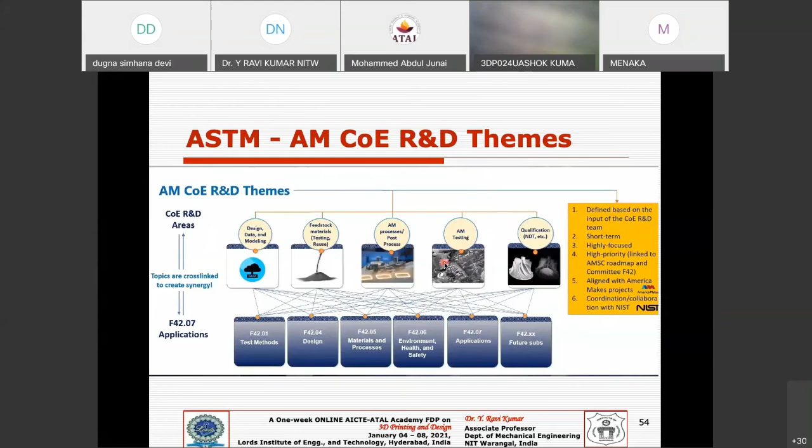And even you can have the present. In 2019-20, they have 9 research projects in powder bed process qualification phase 2, the phase 1 that was given to NASA. And then they have a project on design guidelines for AM process, design for post-processing methods, and polymer AM design, value testing and rapid quality inspection specimens, dynamic testing of polymers of additive manufacturing, and in-process monitoring. This is upcoming, very interesting stuff.

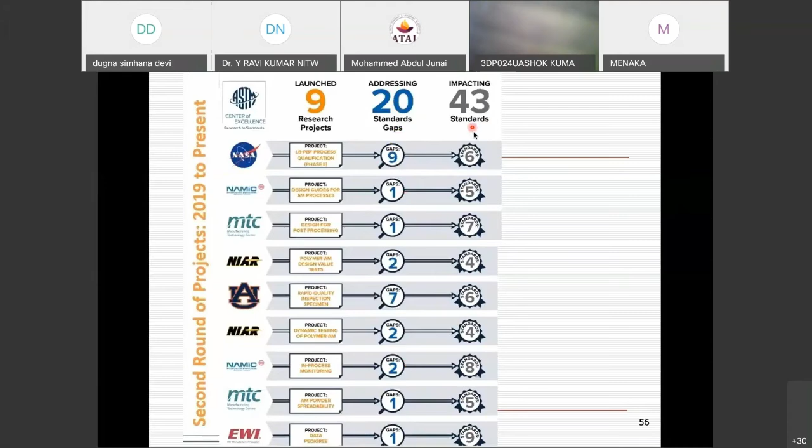So yeah, in order to summarize, for ISO ASTM general guidelines, you have 15 to 17, this ASTM 52900, and design for additive manufacturing you have 3, and feedstock related you have 1, and AM process you have material testing and post-processing, and AM environmental and safety aspects. It's yet to publish, so it is under development. And equipment software, you have ISO ASTM 52915, from 2016.

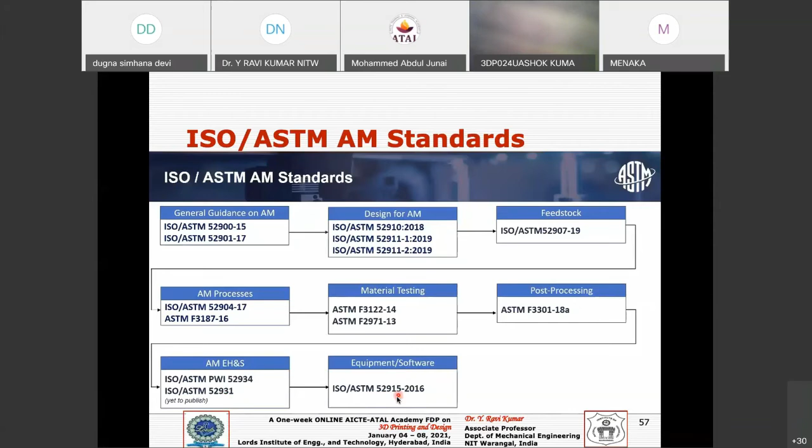And let me conclude what I have done regarding the standards. Combinedly with ISO and ASTM, approximately there are 25 ASTM standards or ISO standards combined. So 25 got published and 50 are under development currently. So either general AM standards, that is AM terminology, test methods or safety under general AM standards, and application specific like automobile, medical, and so on, and feedstock material standards, metal powders, polymer filaments, and process and equipment related standards.

You have powder bed fusion, material extrusion, etc. And finished AM parts, that is post-processing methods and non-destructive evaluation.

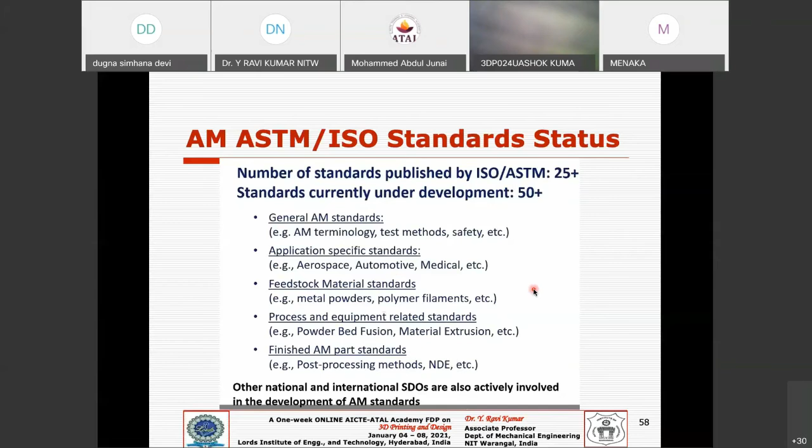And then this is, as on date, the globally, the ISO and ASTM standards for additive manufactured or 3D printed parts. So let me summarize and conclude my talk here.

So we started this talk with the importance of 3D printing design and STL file formats, advantages of STL file formats and problems and challenges, and how it is getting addressed in AMF file format, and the future of AMF and future data file formats.

And ASTM and ISO standards for additive manufactured or 3D printed parts, and qualification and certification, and the state as on date - about 25 plus standards already published and 50 under development for additive manufacturing standards, together ISO and ASTM.

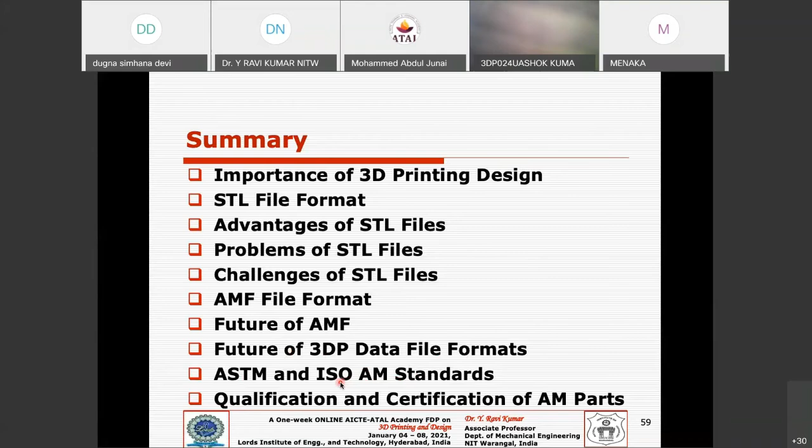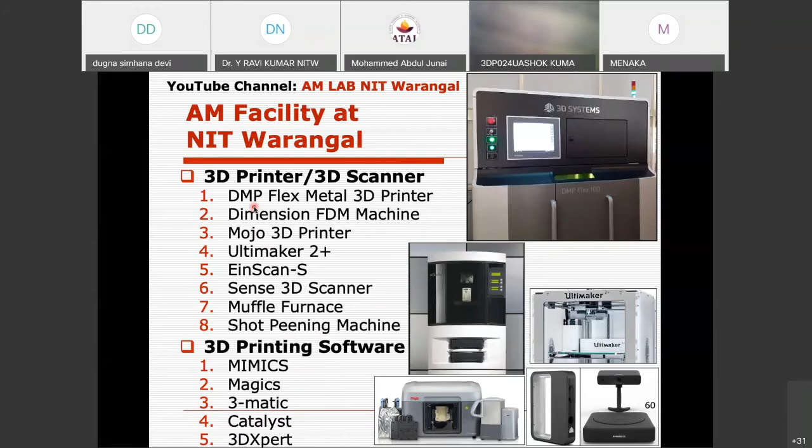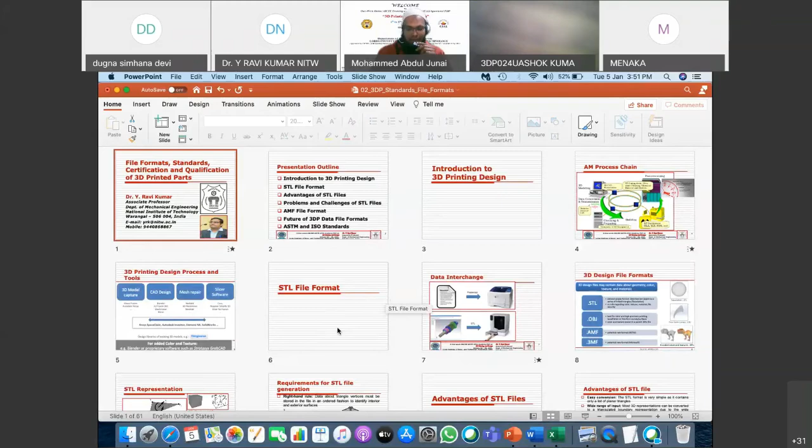So if you have some specific questions, I'm happy to answer those. That was again a wonderful and resourceful session, sir. Your sessions were always resourceful, and definitely we will have research projects and theses of PhDs on these areas. Now I would like to ask the student participants and professors to ask questions if they have any queries.

Any questions? Hello? Hello, are you audible now? Yes, yes, you can ask a question directly. You're live, sir, you can ask your question.

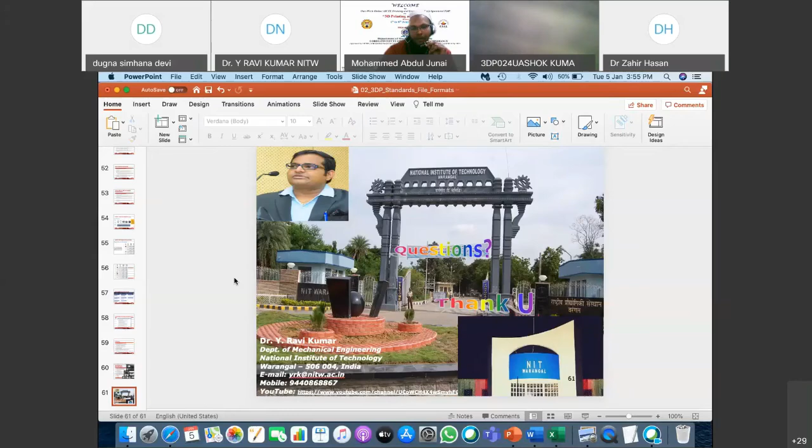But if it is AMF, this error may not be there. Once AMF comes into full-fledged adoption in all the softwares, there won't be a requirement for these repairing algorithms or repairing softwares. But as of now, with STL files and these errors, you may be using softwares like Magics or Meshmixer to get repairs. But if it comes to an AMF file format, these errors may not be there - basically it's going to be a foolproof kind of format.

Hello. Yes, sir, have you finished your answer, sir? Yes. So is there any other question?

Hello, good afternoon, sir. Good afternoon. Yeah, this is Naresh again. Actually, I have a small doubt, sir.

How do we qualify the STL file? Since the STL file is a mesh file, if you want to qualify the mesh properties - since we have mesh quality properties like aspect ratio, skewness, flatness, or Jacobian matrix, whatever it may be - whether these properties will affect the 3D print or not.

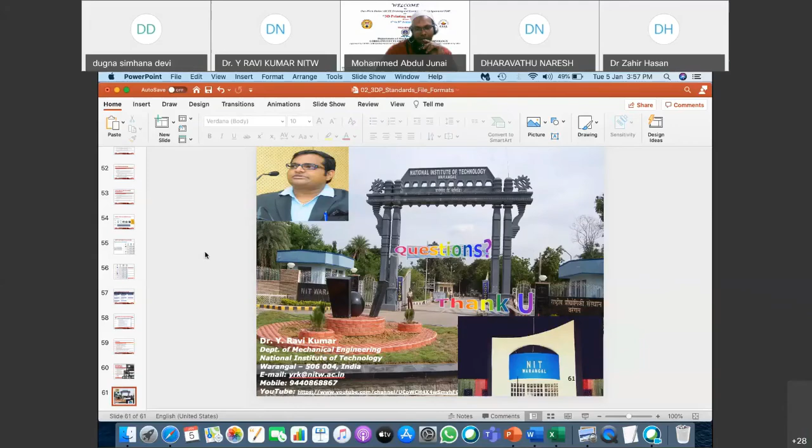How do you get qualified your mesh file?

That's going to be like ASTM—they want to discard STL basically. They don't want to say continue with the mesh file like STL. They want to discard that; their intention is to replace STL with AMF, but unfortunately it is not happening. But definitely it is getting affected by these aspects of your mesh files. The AMF is not a mesh file basically, it's a volumetric representation.

So that will address all these issues definitely, once AMF comes in a full-fledged way and all the 3D printing and CAD/CAM/CAE vendors adopt it. The start point should be from a CAD perspective or CAD/CAM packages. So the vendors developing these CAD/CAM packages should adopt it first, and then accordingly the slicing algorithm should be revamped or retuned as per the AMF files, because the existing file should be rewritten in terms of being in tune with AMF.